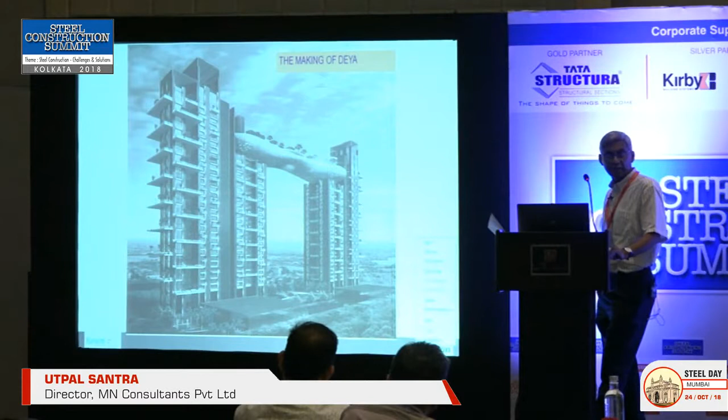Interestingly, this club was named Deya. It's a Bengali term which means heavenly cloud, coined by our famous Rabindranath Tagore. In one or two of his songs you can find this term, Deya, heavenly cloud. So it has been named like that, and we all call this Deya.

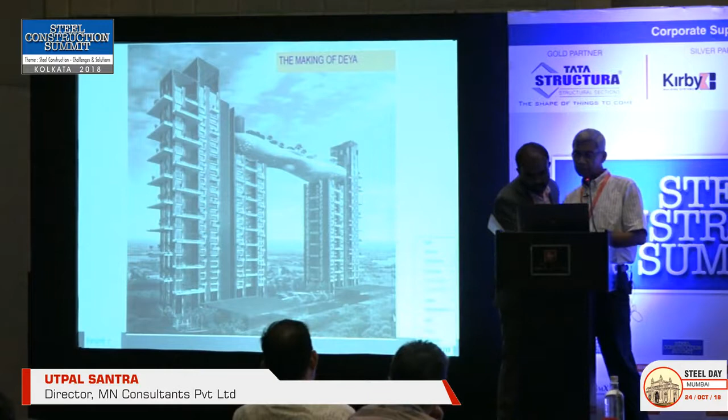So part of this, as you can see, as I said, is a floating luxury club, 400 feet above the ground, and it is an inspiration to all of us, and it was conceived long back. I tell you, it's in the year 2010, and we didn't have any clue about how to do the thing, how to design the thing, how to support the whole thing at that height. It was a huge challenge at that time.

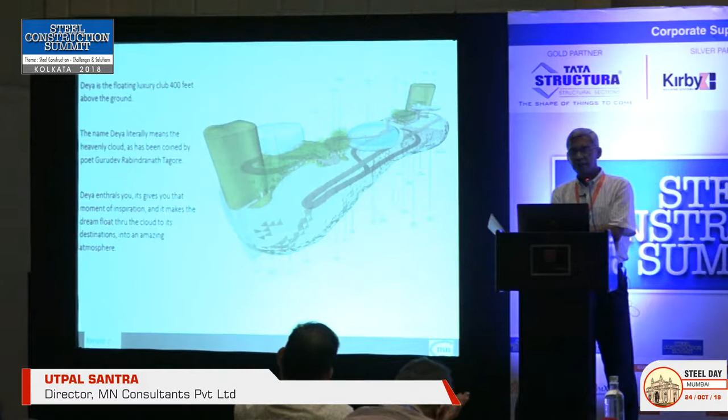But eventually, along with our team, it was led by Dr. Hossein Rezai of Web Structures from Singapore. He headed our team, and our team finally could make it, and it was very successful, as you know. The total span of this bridge is 100 meters, and it has been supported at a 100-meter level. There are 4 level decks. I have repeated this.

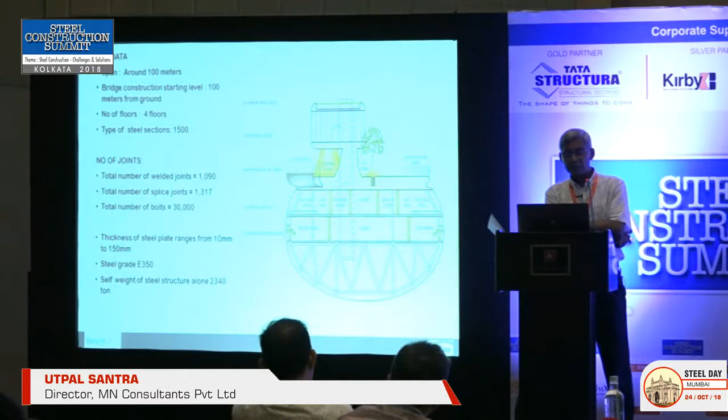The number of joints, as you can see, the statistics are there. A number of bolts, the thickness of plates, 10 mm to 150 mm. Grade of steel is E350. These days, I think, more than this is available in the market, but not in India. At that time when he conceived, E350 was the steel that was available in the international market. And the self-weight of the steel structure itself was 2340 metric tons, which is quite a considerable amount.

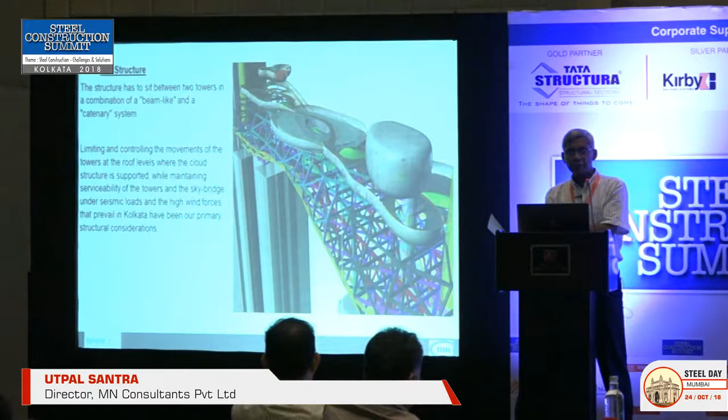Now, we conceived the structure, as you can see, as a beam-like structure which has a catenary to it, so that the serviceability and the deflection of the whole thing can be managed to the limiting values we have. Now, the system: the entire bottom part, that's the bridge part, is the main spine of the entire bridge. And you have a crown to your left, the top hat at the center, and again to your right you have the crown.

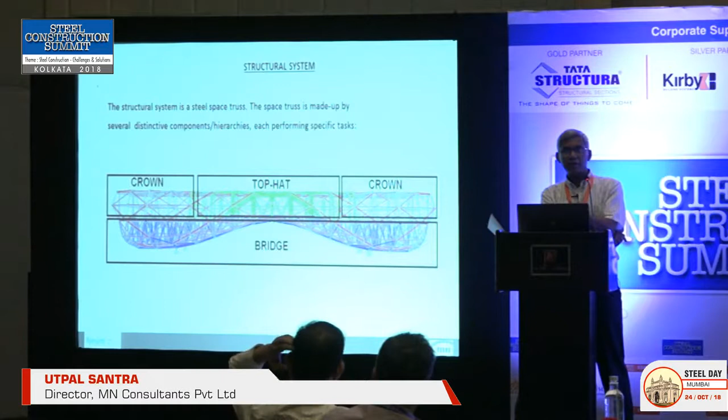So the bottom part, the bridge part, the blue part which you can see, taken from our computer model, is the main support system to the entire thing, and the crown and the top hat. The top hat is adding some more stability, helping us towards the deflection serviceability of the thing. But as strength, the bottom part is giving you the strength, so that the entire load is coming onto this.

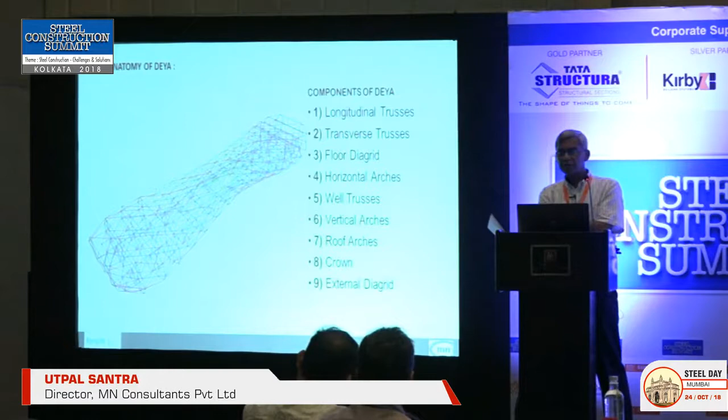So this is the anatomy of the components. There's a longitudinal truss, a transverse truss, a floor diagrid, horizontal arches, well trusses, vertical arches, roof arches, crown, and the external diagrid. Now, we have tried to take out some of the major components of the whole bridge. The first one, the longitudinal truss or the truss girder, is basically supporting the entire structure longitudinally. And from there, we have the transverse trusses, which are transversely attached to the longitudinal truss and cantilevering out.

There's a floor diagrid which is providing lateral bracing to the whole system, and the floor systems are supported on this lateral bracing. We have horizontal arches on the sides to take care of the wind forces and take them back to your longitudinal truss. You noticed in the beginning that there is a well, a hole at the center. It was intentionally kept not really to reduce the wind load, but it was the architect's dream to have a hole at the center.

So this well truss is supporting that well at the center, and the vertical arches, as I said, are helping us in reducing the deflection of the whole structure. Then we have the roof arches, the crown and the external diagrid, which is interesting. We finally put an external diagrid so that it is also helping in supporting the facade as well as the entire structure. It gives much more rigidity to the whole thing. It acts as a more solid shell-like structure rather than a single unit.

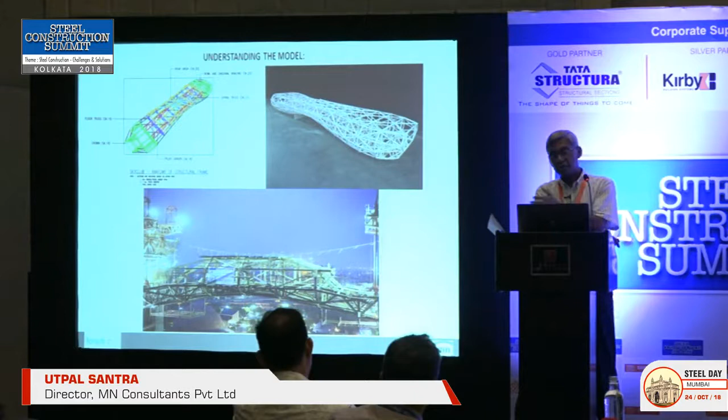So the design criteria that we primarily fixed up is of course the stability check of the bridge for the vertical and the lateral stability, and the stability check for the building with respect to the forces generated due to the bridge. For example, the bridge, as you can understand, is a tall structure there with 4 level decks and 100 meters long.

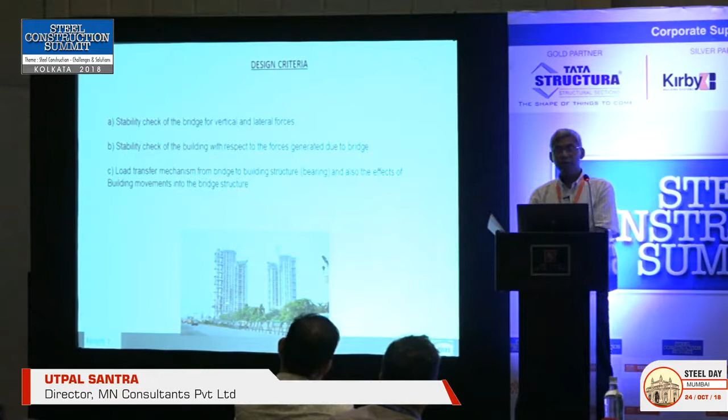The surface area and the wind that will come will affect your building structure itself. So that was one of the criteria, how to solve it, because the forces are astronomically high. We did the wind tunnel test also in Singapore. Then the major thing that we were struggling with was how to support the whole system, what will be the support conditions.

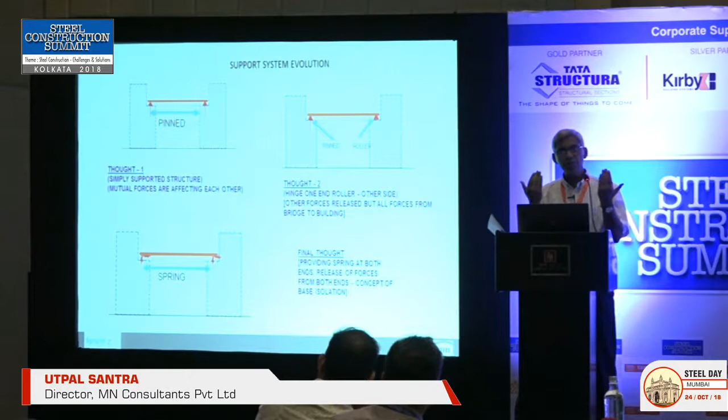As I explained earlier, there can be interfaces in movements of the buildings. The building is moving this way, the other can, in seismic conditions, move the other direction, and there can be phase lag in the dynamics of the whole building. So this movement will definitely generate a twisting in the whole bridge and the turning in the whole bridge.

So initially we thought of doing a pin connection between the two buildings. But the lateral forces that were generated from the bridge to the building, we couldn't support within the serviceability conditions, because the sway of the building has to also cater to the comfort of the people staying there. So there is an acceleration that will generate in the building, which we have to take care of.

Then we thought of releasing the forces. Second thought was a pin connection and the roller on the other side. Then again, we realized that yes, the bridge is released, the bridge is out of stress, but again, the building is not safe. The left building is attracting all the forces together. So that is also not done. Then came that, well, we cannot sustain this type of support system.

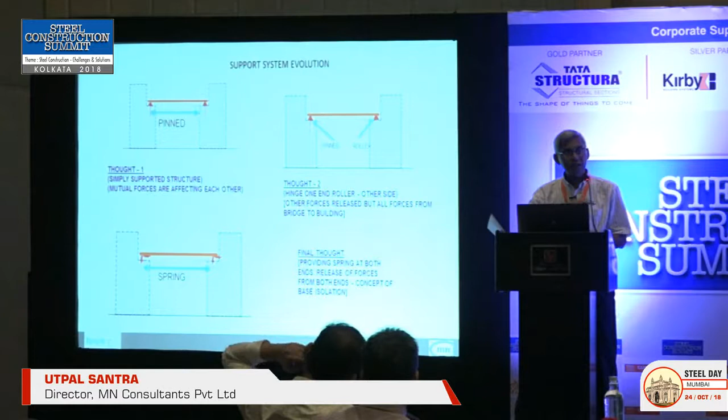Then we came across the spring support system, which will allow the building to move in its own plane. So the release of the forces will happen, and probably this is the thought of base isolation that emerged out. At that point of time, well, base isolation, yes, we heard of that, but what it really is, we were not familiar with base isolation.

So then we got hold of one of the major designers, R.J. Watson of US, to help us out in designing the bearing.

Then they came across a very nice design, and they found out this Eradiquake bearing. Now this Eradiquake bearing is a bearing. Everybody is aware of the upholstery of your car. If anybody has seen the old Ambassador cars, there are vertical springs and there are horizontal springs in all directions. What is it doing really? It is just giving you comfort; when braking, when accelerating, you are not moving, because the seat is adjusting, the spring is adjusting along with the movement.

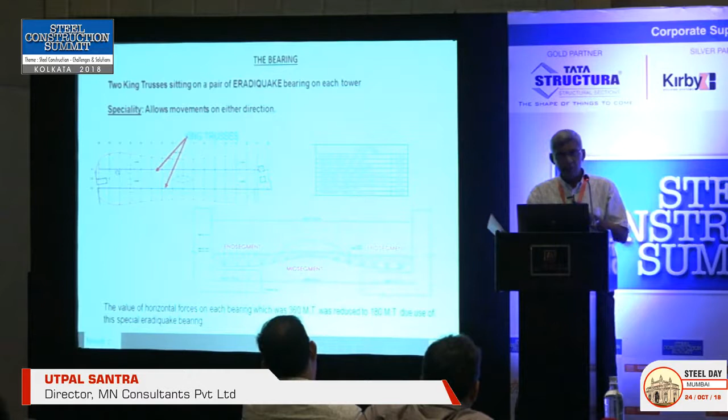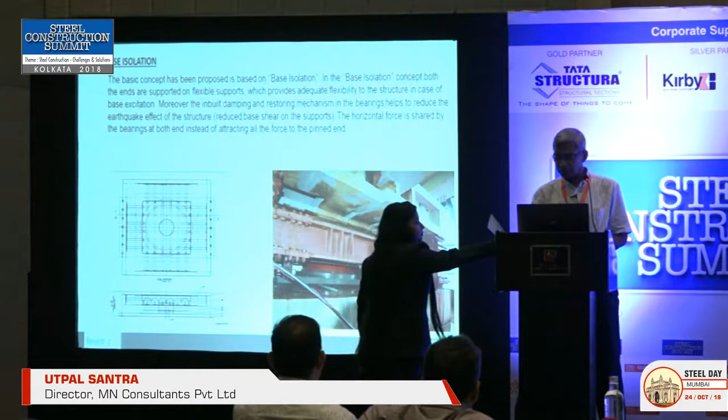It was, again, a nightmare to lift that 15 tons up there at the 100 meters level. And then we thought, suppose at some point in time this bearing needs to be replaced. So we did some rails underneath so that it can be taken out, jacked up, and replaced.

So I think Our Lady has given me a warning of 2 minutes, I don't know.

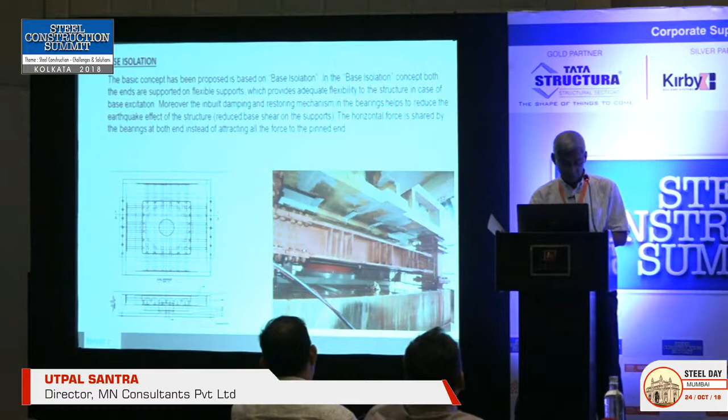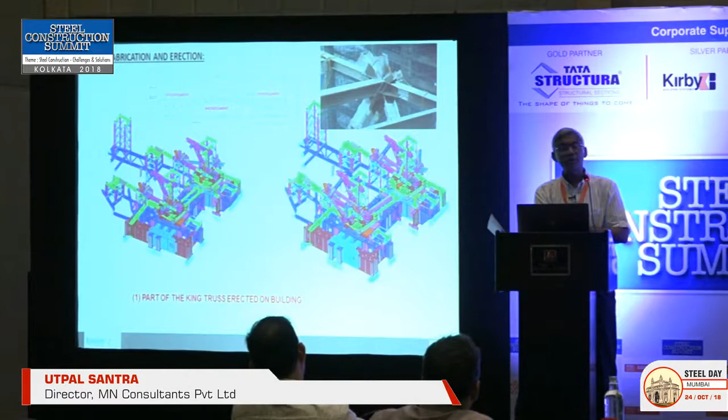So the fabrication and erection has been talked about throughout the country. But let me tell you that the end segments were erected on site, and the mid segment was lifted through jacks and strands up there and fitted. And one such joint you can see to your right corner, a typical joint that was fabricated and taken up to the site. You can see how many protrusions have come out from one joint.

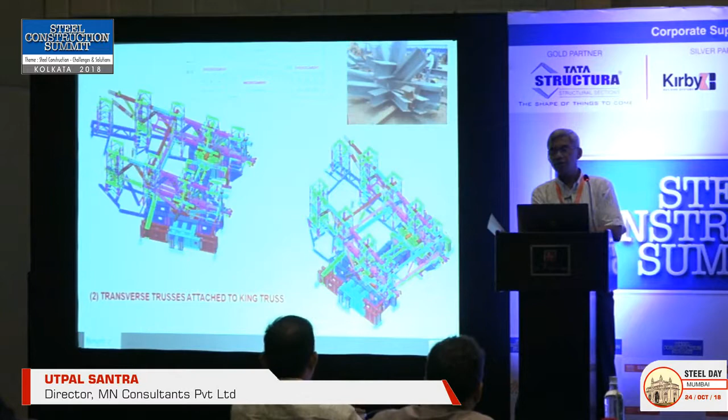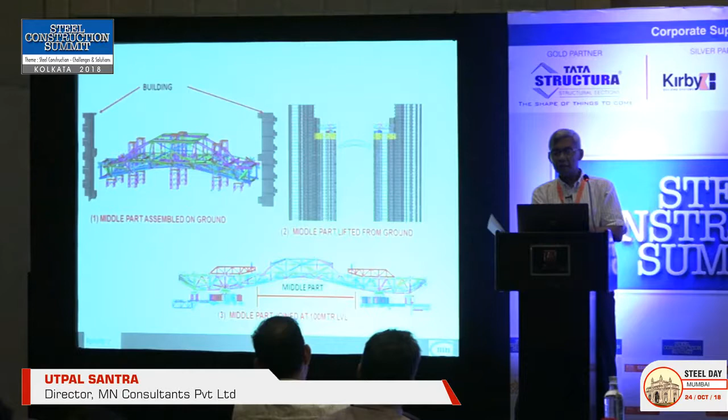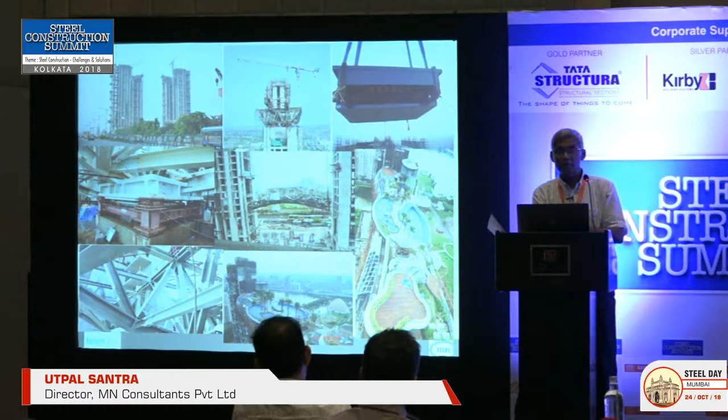It has been executed. This is how the bridge looks today. It's in our city, at the heart of the city. I know that many of you have seen it, but even if you haven't, I think it's worth seeing. It's our city's pride, and we hope we engineers have made you proud of our city, and many such things will make it.

Don't worry. Do you have time for one more?

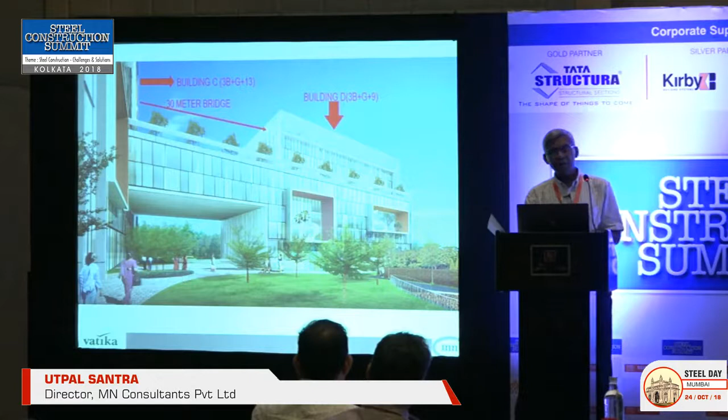Okay. Another very interesting project, which is close to my heart: a commercial building, Mindscape in Faridabad. These are two buildings again, 3 basements plus ground plus 9, and the other one 3 basements plus ground plus 13. And we have a 30-meter bridge. This bridge is not a bridge; it's an office space. Again, the connection of the two buildings was a problem. You can see that we have 4 levels of bridge, and again, the concept was base isolation.

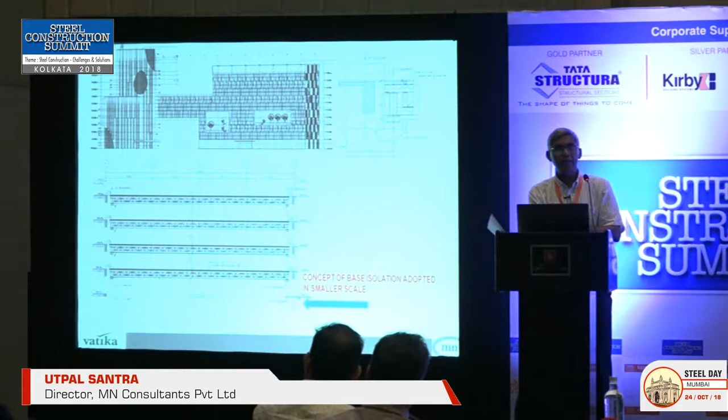We did the base isolation, but on a much smaller scale, of course not on the scale of the heavy load that we have taken there. And the bearings were also much lesser in capacity. The plan looked like this, with the central bracing, and closely spaced girders.